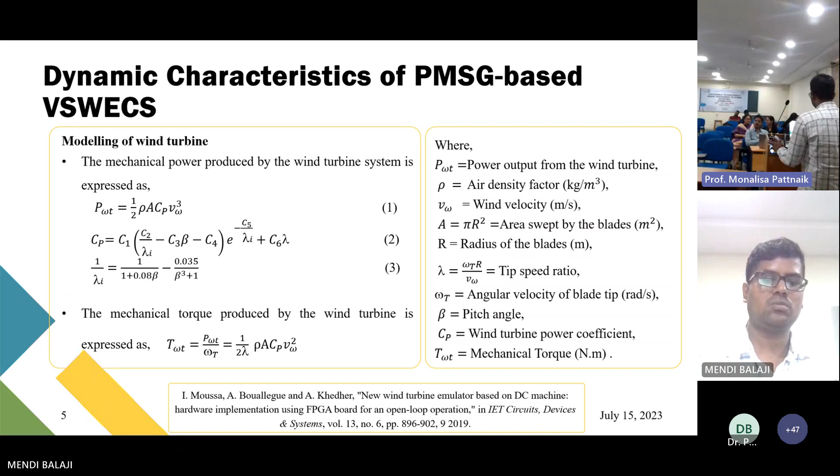So these are the dynamic characteristics of the PMSG based WECS. This is the modeling of the turbine equations, already covered by my colleague Pradyumna Kumar Bera. So here I am focusing on the steady state modeling equations of the PMSG.

The DC diode rectifier output voltage and current are given in equations 10 and 11. We get these by neglecting the commutating angle and inductance of the converter and the generator. Equation 12 gives the output power of the wind energy conversion system, also neglecting power loss during diode circuit rectification.

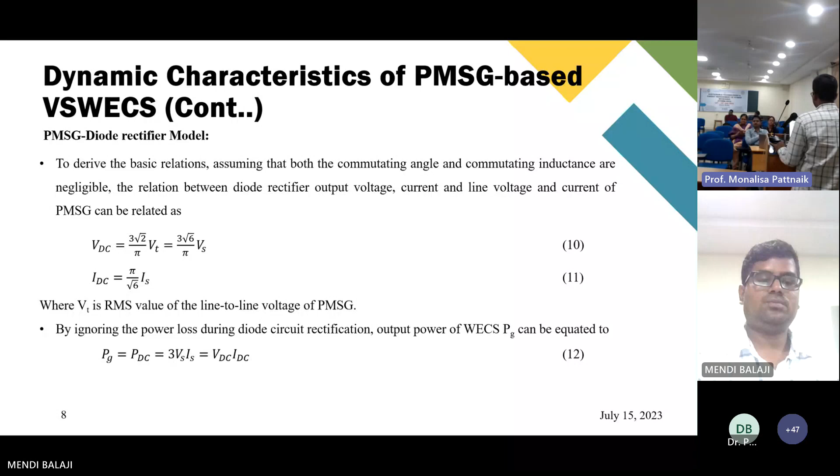That is about the dynamic characteristics of the wind energy conversion system. Now I am going to explain the boost converter basics, which we are already aware of.

The boost converter is used for two purposes: one is to enhance the voltage level, and the second is for extracting the maximum power from the wind. It is a simple non-isolated converter. The output voltage of the converter is given as input voltage divided by 1 minus D.

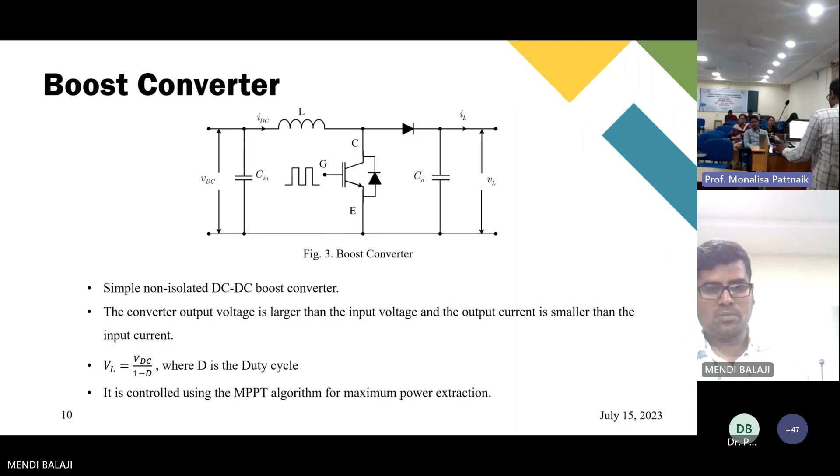These are the input impedance characteristics of the boost converter. Here the converter acts as a load, so we are interested in its input resistance. By varying the duty cycle of the converter, the input resistance will be varied, as represented by figures 4 and 5. By operating the duty cycle at the optimum level, we can extract the maximum power.

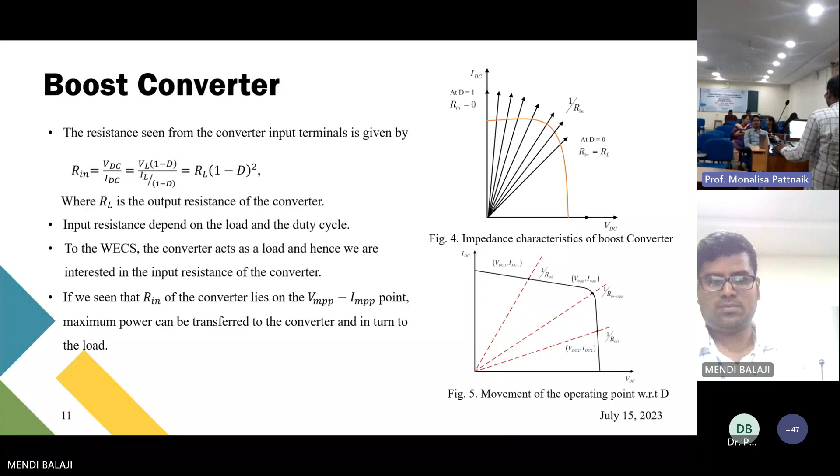These are the input and output characteristics of the boost converter in the wind energy conversion system with variation of the duty cycle. On the input side, as duty cycle increases, the boost converter input current increases while voltage is reduced. The PV characteristics of the input and output of the converter are different, and based on these characteristics, we can develop various MPPT algorithms.

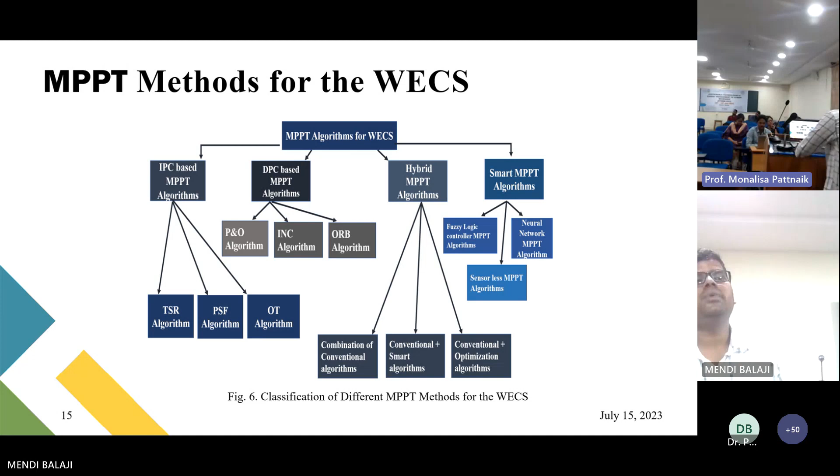So here I am focusing on the hardware implementation of the basic P&O algorithm, which I will now explain.

With that, we can develop one MPPT algorithm, which is the speed encoder based algorithm. What we have to do is transform that to converter parameters. For that, by neglecting the generator and converter losses, PM will be equal to the DC side power. Also, in PMSG, the terminal voltage of the generator is proportional to the speed, hence the speed is replaced with VDC. So in this way, dPdc by dVdc equals zero can be obtained, and with that we can develop the algorithm in terms of PDC and VDC.

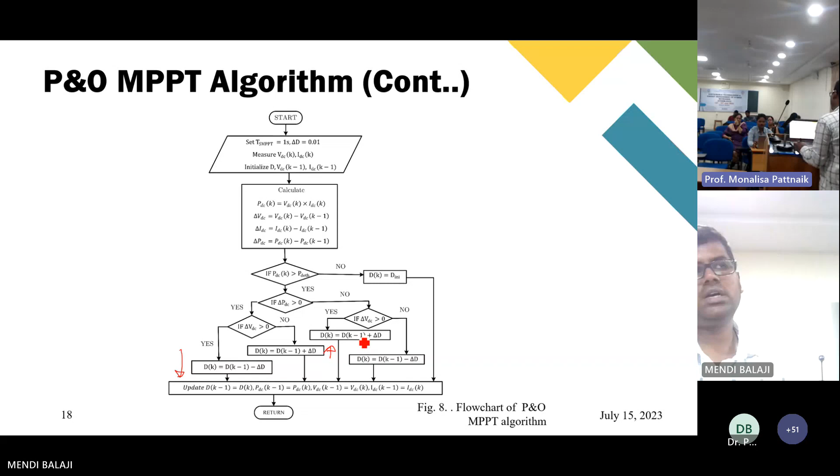If it is yes, then it will search the change in VDC condition. If change in power and change in VDC both are positive, then duty cycle will be reduced. If change in power is positive and change in voltage is negative, then duty cycle will be increased. In this way, we can achieve the MPP by giving the desired duty cycle.

In order to extract maximum power through proper duty cycle, you need to select the proper perturbation step size and perturbation step time. You cannot give any random change in duty cycle. If you give, suppose, a duty cycle change of around 10%, the change in voltage, current and power of the converters will be more, which may lead to more stress on the converter. That's why you have to select the proper delta D max and delta D minimum. In order to avoid steady state oscillations, you cannot use a very small delta D.

Suppose if you give 0.001, that much change may not be detected by digital controllers like dSPACE, DSP or OPAL-RT, since that depends upon the ADC resolution and tracking accuracy in the steady state. After experimentation, we have observed that the delta D range is 1% to 5%. So within that range we have operated, that is the healthy operating range.

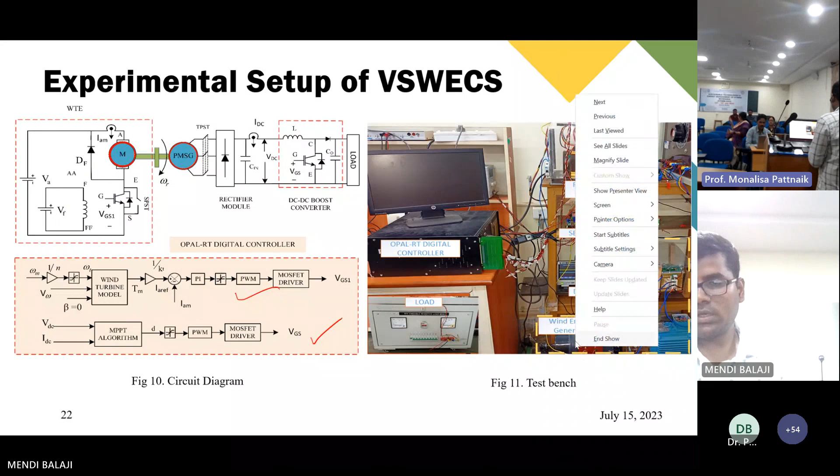These are the wind turbine MPPT, wind turbine emulator controller, and this one is the MPPT controller. These two are developed in the OPAL-RT software. This is the test bench of the wind energy conversion system. Here, all the sensor signals are interfaced to the Wanda box, made by OPAL-RT Technologies, through analog and digital cords. This is the DC motor coupled to the PMSG.

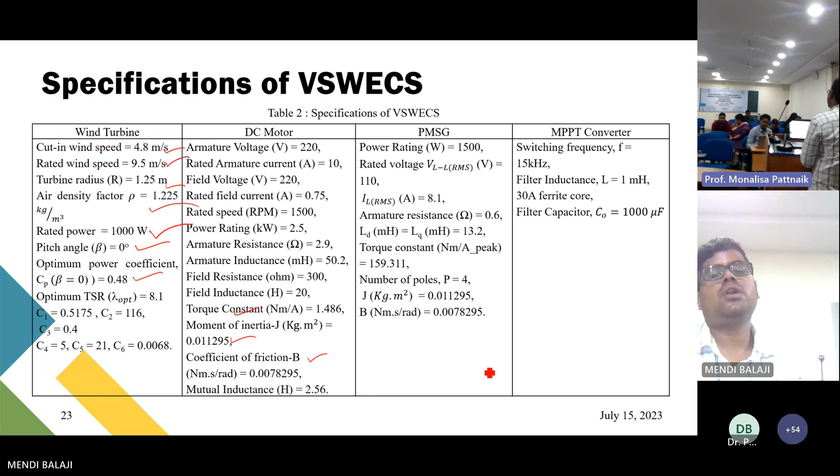Similarly for PMSG side, the nameplate rating they have given is 1.5 kilowatt, rated voltage is 110 volt, and rated line current they have given 8.1 amperes, and rest of the parameters we have calculated.

These are the MPPT converter specifications. The switching frequency we have considered 15 kHz for the IGBT, and the filter inductance we got around 0.74 millihenry. So we have taken a 1 millihenry 30 ampere ferrite core inductor, and filter capacitor 1000 microfarad 450 volt DC electrolytic capacitor we have used.

So for MPPT algorithm we need voltage and current sensors. For the voltage sensor we have used LV25P voltage sensor. It can measure up to 500 volt nominal RMS voltage, which requires plus or minus 15 volt DC power supply, and the burden resistance range we have to select in between 100 to 350 ohm.

Suppose for the MPPT converter you want to measure 300 volt, so that should be scaled down to 5 volt, and you need to choose one input resistor. We have selected 30 kilo ohm, so that the input current of the sensor should be around within 10 milliampere. So the burden resistance we have calculated is 200 ohm, which is within the range of 100 to 350.

So the extra components required are an input resistor of 30 kilo ohm and burden resistance of 200 ohm, and you need to give external DC supply of plus or minus 15 volt.

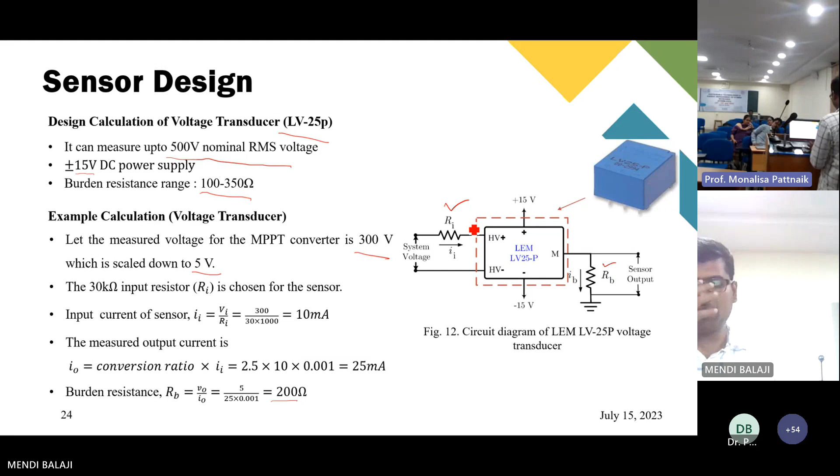And this is about the current sensor, which suppose if you want to measure current for 25 ampere, this is also considered in terms of voltage only, so it is scaled down to 5 volt. Here we have wound the number of turns as two only, because the conductor size diameter is more, so it is very difficult to wind more turns in the diameter of the current sensor. So we have considered 2, and accordingly we have calculated the burden resistance as 100 ohm.

That is also within the range of the burden resistance range, 50 to 160 ohm. So here the extra components needed are number of turns, 2, and the burden resistance value we have considered, 100 ohm. Here also external plus or minus 15 volts is required. In this way we can measure the current.

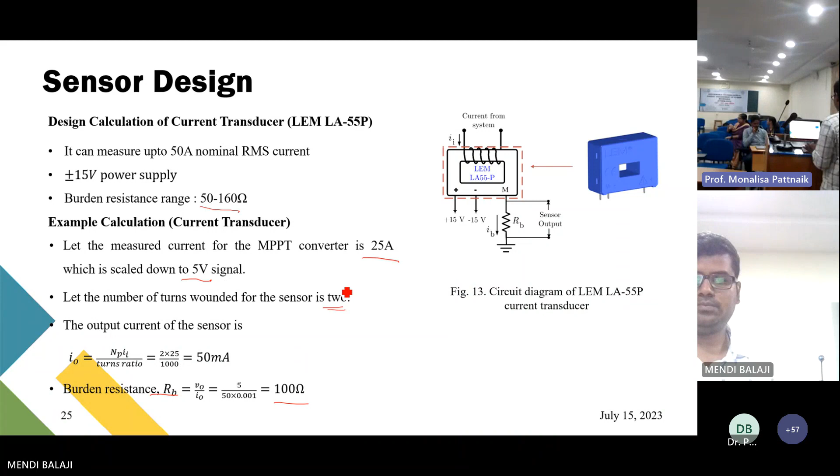So these are the low power signals. These can be interfaced to any software like Opal-RT, dSPACE, or DSP software. This is the wind turbine emulator we have developed in the laboratory.

So to drive the IGBT, we have used Skyper 32R gate driver, and Opal-RT generates a 5 volt PWM signal, but to drive the IGBT it requires 15 volt. So we have used a bootstrap circuit which will convert the 5 to 15 volt PWM signal.

This is the IGBT we have used, SKM 75GB 12T4, meaning 75 ampere 1200 volts, which we have used.

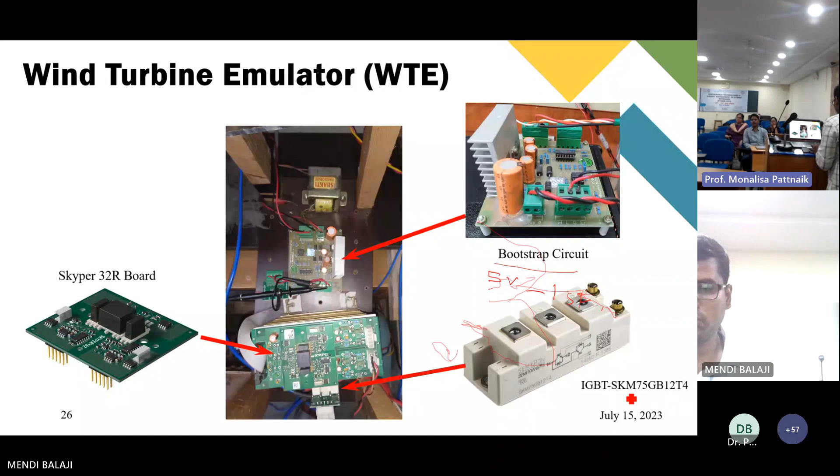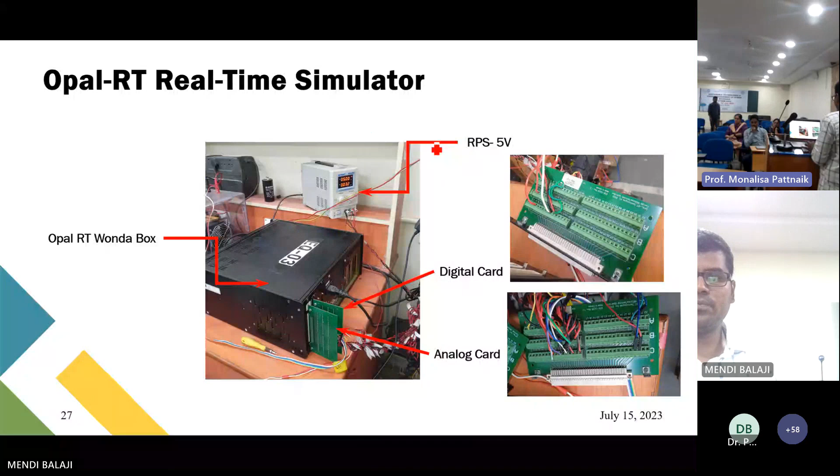This is the Opal-RT real-time simulator, the Opal-RT Wanda box, in that a DSP processor is inside, which is made by Opal-RT Technologies. Here the sensors and PWM signals are interfaced through analog and digital cards. For the digital card, to produce the PWM signal, you need to give external 5 volt power supply. For that, an RPS we have used, which is set to 5 volt.

Earlier my colleagues have used DSpace for the PV system and for the wind system. Here I have used Opal-RT software. So I will explain how to use this software to interface for the rapid control prototyping, meaning the plant is outside, where generators, turbine, PV will be outside, and only the controller is inside the PC.

So hardware requirements are: a host PC required, the Wanda box already I have shown which is manufactured by Opal-RT Technologies, and one LAN wire is required, which is the communication link between PC and Wanda box.

The software requirements are RTLab software, version 10.6.5.293. This one we have used. This is the old Opal-RT, so that's why we have used the compatible software, the 2011 32-bit version. Now Opal-RT has upgraded its version of MATLAB support, it can support the latest one also.

So in this video, I will explain how to develop the MATLAB model, and what are the steps required to execute the model. These things I will explain in this video.

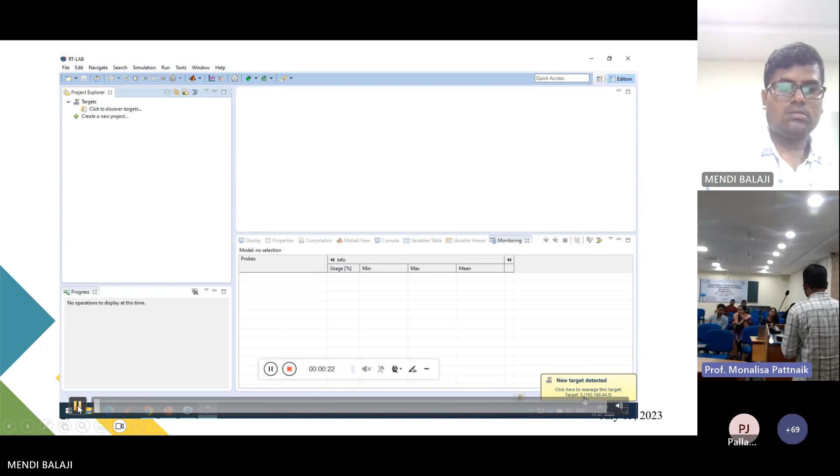So once the Wanda box is switched on, then you need to create the target. Mostly it will detect automatically. There you have to address the IP. So here the state is showing up, license is activated. That means Wanda box is switched on.

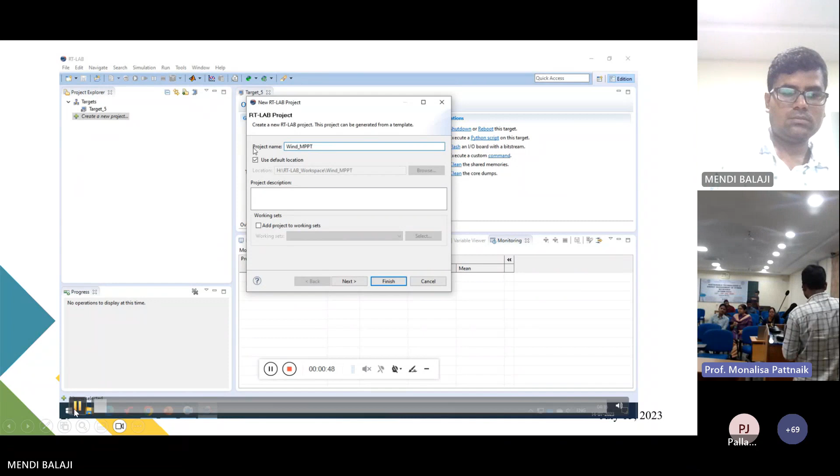Once the target is set, the next step is you need to create the new project. So here I have given name some wind MPPT. So project is created, which is shown on the left side.

So go to workspace, which is in H drive. So there wind MPPT folder is created automatically. So in that folder you have to place 3 files, which are: one is MATLAB model, second one is bitstream file, and third one is configuration file, pin configuration file.

So those 3 files I have copy pasted in the folder which we have created. Bitstream file enables the library of the RTLab through MATLAB, and pin configuration file is used to identify the pins where we are connecting the sensors and extracting the PWM signals. For identification of that, we are configuring the pin configuration file. It is 1 KB bit file.

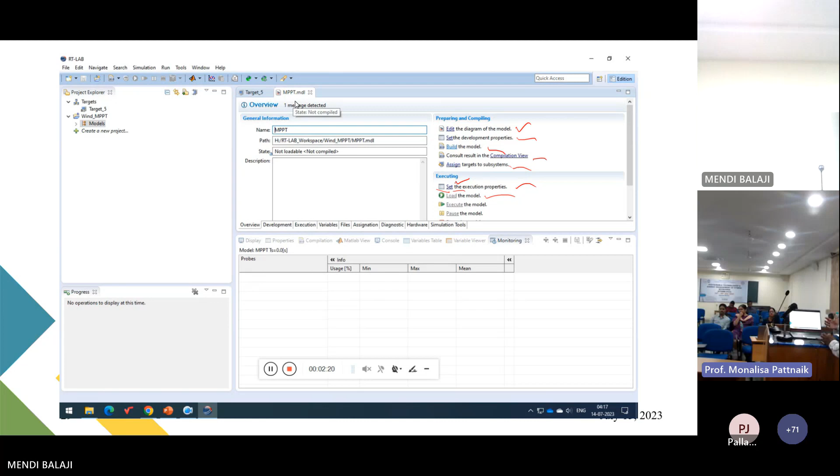So these are the steps to execute our model. First one is edit the model. Second step is we have to develop the properties. Then build the model. Building means it will generate C code which can be understood by the DSP processor of the Wanda box. Then compilation view. Then you have to assign the targets and execution properties. Then you have to load the model. Once you load the model, that means it is ready to deliver the PWM signal or ready to take the sensor signals. Once you execute, then it will generate the PWM signals.

So this one I will explain one by one.

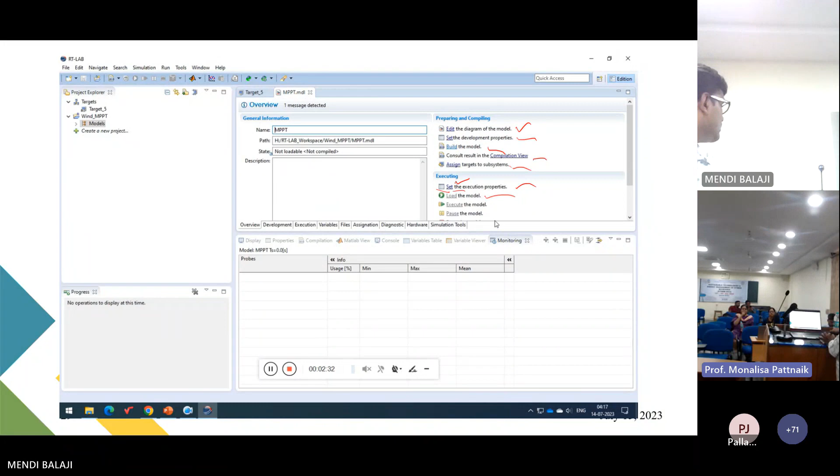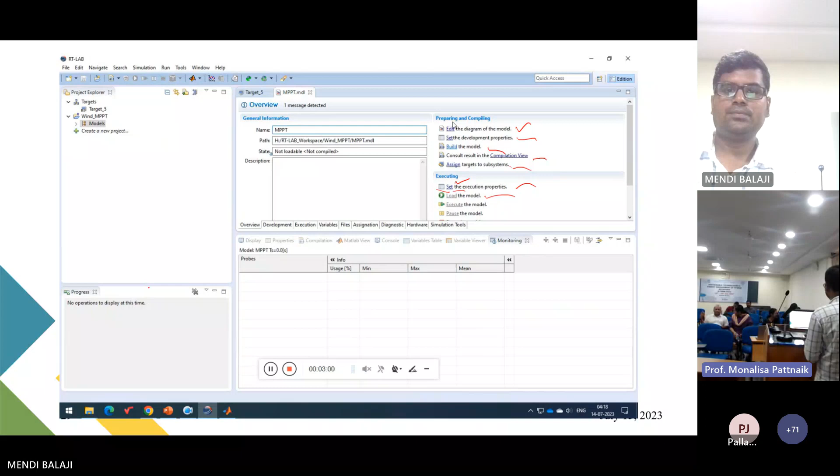So you have to open the MATLAB through RTLab software only. Then only the RT-LAB library will be added to the MATLAB Simulink library. So here MATLAB is opened through RTLab. MATLAB main window is opened. Then edit the model.

So this is the model we have created in the MATLAB Simulink. So we have to create two subsystems. One is computational subsystem, another one is for displaying the results. So you need to give naming SM underscore some name you can give, and another block is SC underscore some name. Then only the Opal-RT software can understand, can compute the model.

So in this way you have to give the naming. In the SM computational, where entire our model is presented, and this one, the SC model, is for displaying the results. And here our emulator controller and P&O controller is presented.

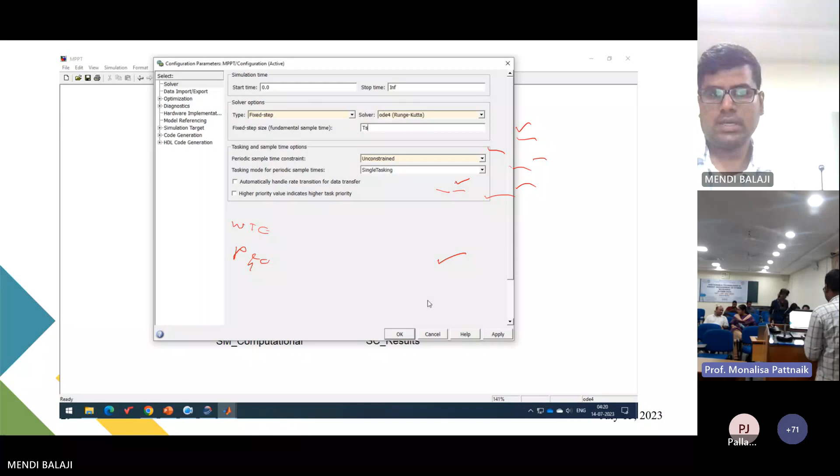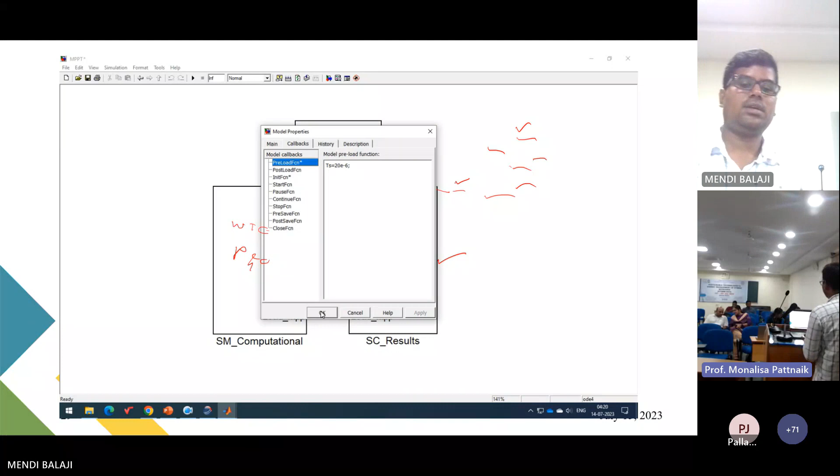And in the configuration parameters, solver type should be fixed step, and solver I have used Runge-Kutta ODE4, and fixed step size I have given the name TS, I have given 20 microseconds. 10 microsecond to 50 microseconds we can use. In the model properties callbacks, there I have addressed TS, which is 20 microseconds, so that in each and every block we no need to mention 20 microseconds. Directly we can call TS name.

Power GUI block, there also the simulation type discrete, solver type Tustin I have used, and sampling time there also you have to mention. And the simulation time should be infinite, INF.

So this is the model we have developed. In that, wind turbine emulator controller is presented, MPPT controller is presented, and also this software facilitates the storage of hardware data. We can store the data through DSO, or it will store the data in .mat file format. And these are the analog sensor integration and PWM generation. So these blocks are available in the library that I will show. This is the block required, OP control OP5142.

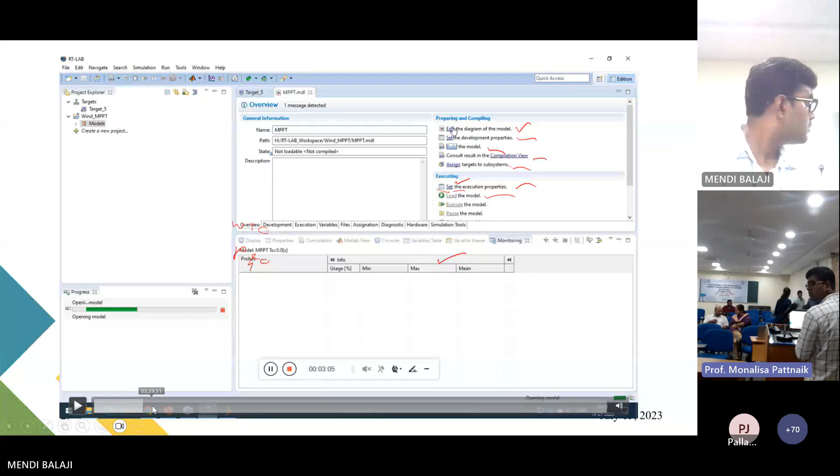In the library, RT events, RT Lab, RT IO are added in MATLAB. Go to RT Lab IO, then go to OP5142. There analog in, analog out, digital in, digital out blocks are available. From there we have taken the OP5142 control block. This block controls the programming of one OP5142 card. It initializes and selects the hardware synchronization mode of the card, and enables the analog and digital signals.

This is the first block we have to add to the model. There, the bitstream address we have to give. In the workspace, we have copied 3 files: bitstream file, configuration file, and Simulink model. That bitstream address we have to copy paste here. So this is the bitstream file. That address you have to copy into the OP5142 block. Remaining things you keep as it is.

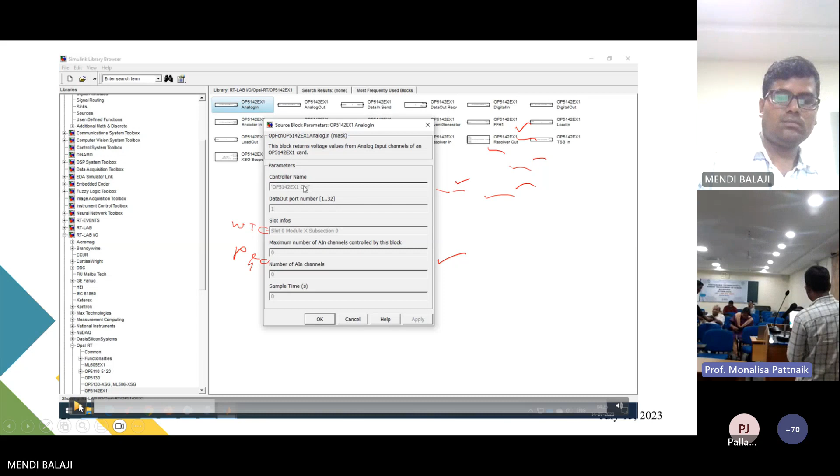Then to interface the sensor signals, you need to use the analog in block, which is also available in the RT-LAB library. This is the OP5142 analog in block, where we can connect a maximum of 8 sensor signals. Here I am using 6 sensor signals. For the boost converter, 4 signals are required: input voltage side, input current, output voltage, output current. And for the emulator, a current sensor is required. And for the speed encoder also we have used an analog in channel.

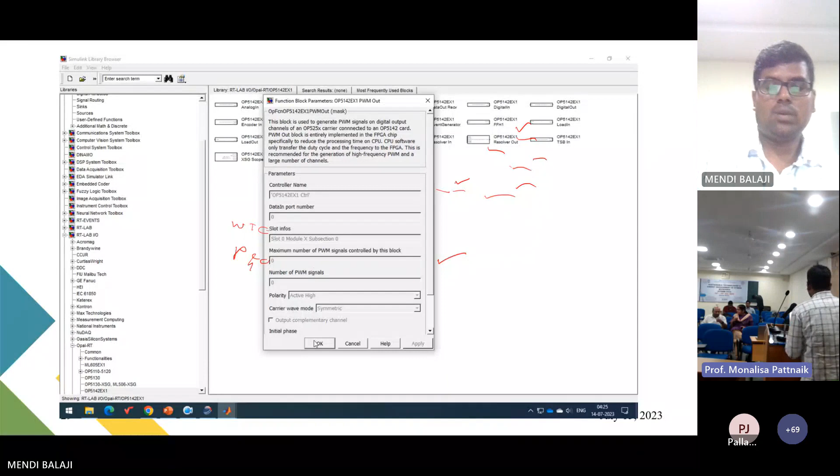This is the PWM out block. This Wanda box can give a maximum of 8 PWM signals.

Using the pin configuration file, we can activate this analog in block. This is the pin configuration file where analog in number is data out 5. That number we have to enter there, so that it will select slot 1, module B, subsection 1. There we can give a maximum of 8 analog in signals. Data out 5, data out 6 - total 2 analog in blocks are there, meaning total 16 signals we can connect.

Once you give data out port number 5, then that slot information will be activated. So the maximum number of analog in channels we have considered is 6.

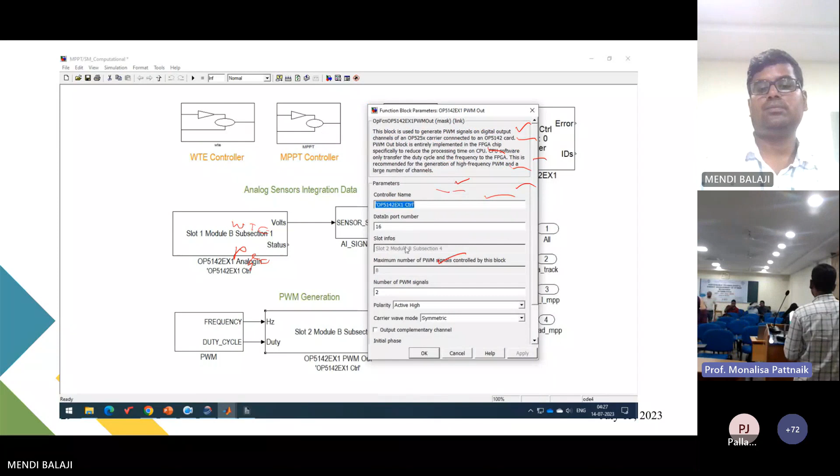Next thing is the PWM out block. The inputs required are frequency and duty cycle, which can be selected by entering data in port 16. So the slot, it is slot 2, module B, subsection 4, which is having 8 PWM out signals.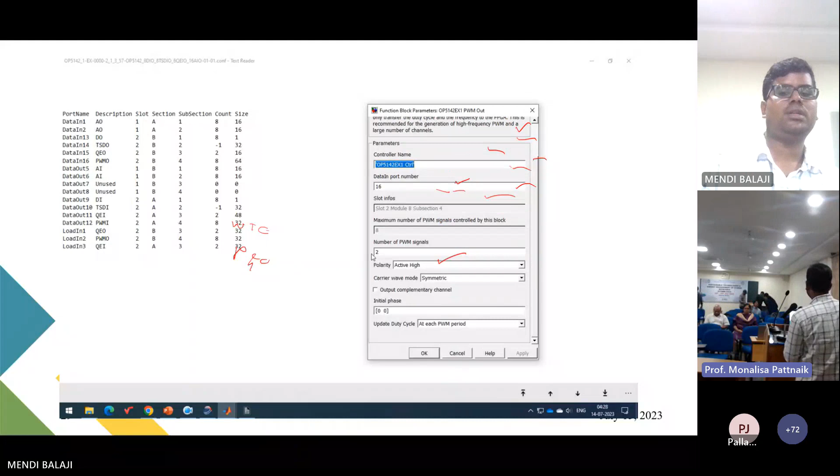Here I have used number of PWM signals 2: one is for the wind turbine emulator controller, second one is for the MPPT controller, P and O. So since there are 2 signals, the initial phase should be 2. If we want some complementary signal, then you have to highlight that one, and at that time also we can mention it.

So next thing is wind turbine emulator controller design, where the modeling equations of the turbine are presented. Here CP calculation, lambda calculation, mechanical power calculation, armature reference current calculation are given, and also wind turbine duty cycle generation through a PI controller has been developed.

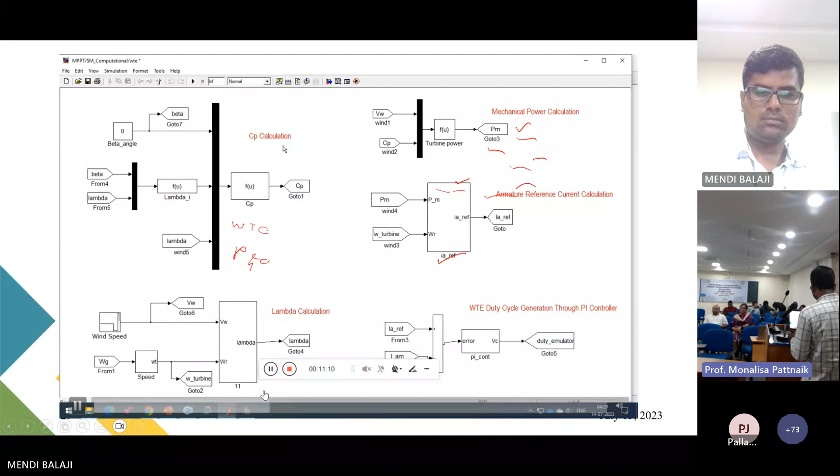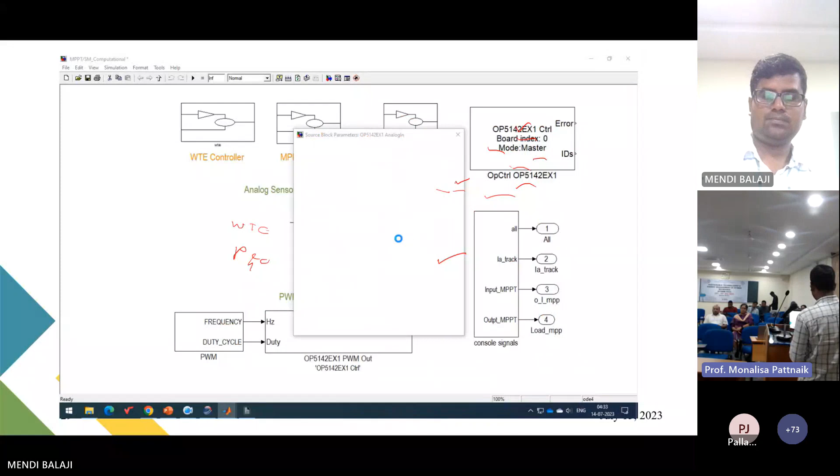So next thing is sensor signals. These are the six signals we have extracted from the plant.

First one is the speed signal, where we have used a proximity sensor, connected to the first channel of the analog in. Second one is the armature current sensor from the wind turbine emulator. Third one is the boost converter input voltage sensor. Fourth one is input current. Fifth one is load voltage sensor, and sixth one is load current sensor. These 6 sensors we have connected from the analog in.

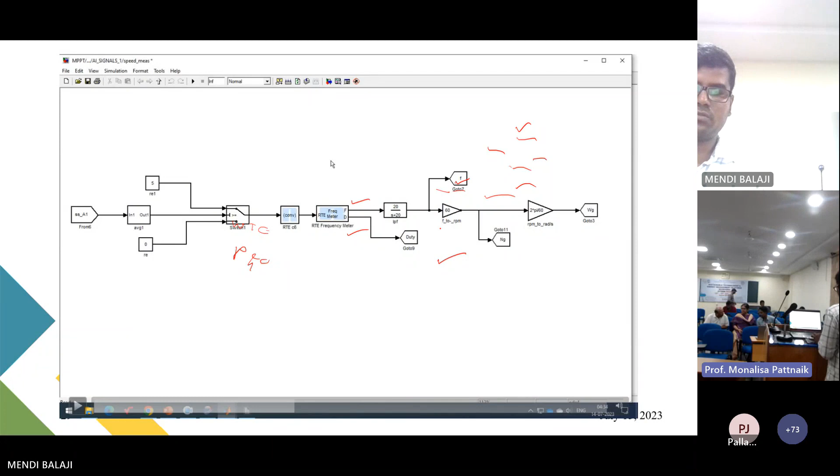This is the speed measurement. Here we are getting some speed sensor signal, which we give to the RTE frequency meter that separates frequency and duty cycle. From the frequency, it is filtered and converted to RPM, frequency to RPM, then RPM to radian per second. In that way we have converted it.

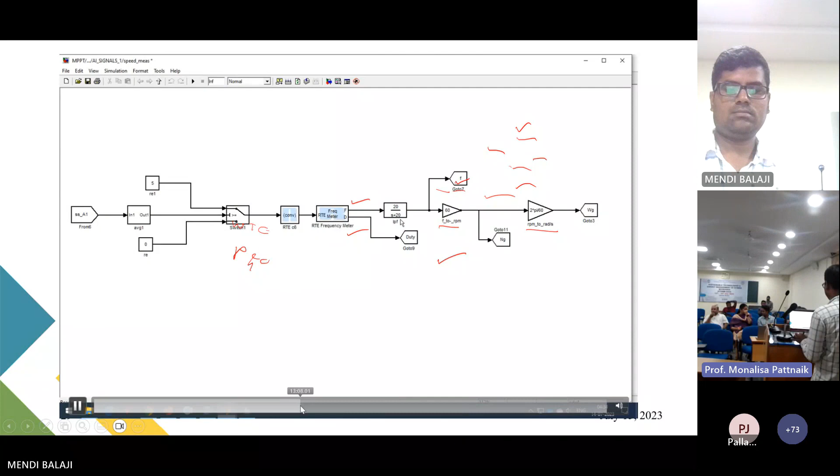These are the sensor signals. This is the armature current sensor. This one is subtracted with its offset value. When you give the current sensor plus or minus 15 volts without running the experiment, it will still show some offset value, so that one we are avoiding here. Then it is processed through the low pass filter, we have used 20 by S plus 20. Then it is averaged, and multiplied with the sensor gain, so that we will get the actual plant value here.

And also the VDC sensor is processed the same way. It is differentiated with the offset value, then given to the low pass filter, and multiplied with its voltage gain 53.62. This is the VDC actual. Similarly, IDC and PDC we are getting from the multiplication of VDC and IDC. Similarly on the load side, V load, I load, and P load we are getting. These are all the average values. For the MPPT algorithm we require the averaged value, so that's why we have used low pass filters.

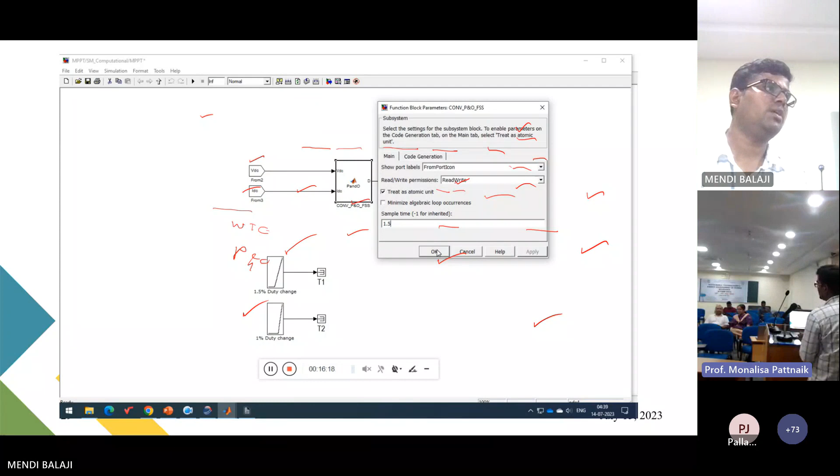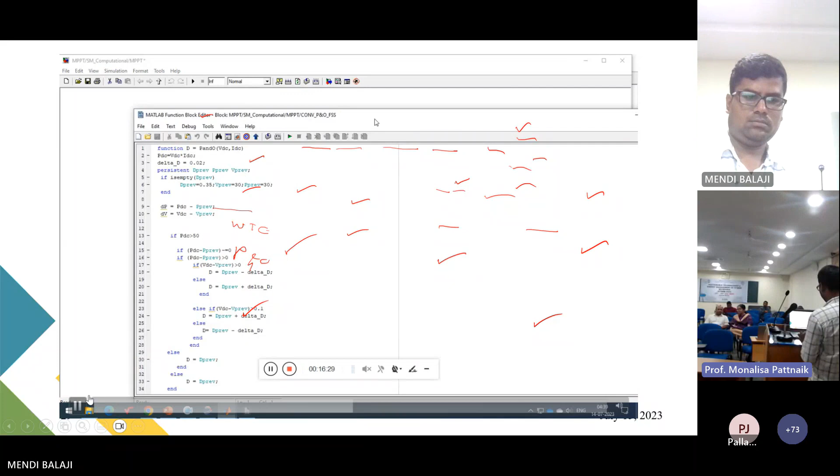This is the MPPT code we have used. First of all, we have to call VDC and IDC. Then PDC is calculated as VDC into IDC. Perturbation step size, here I have considered 2%, 0.

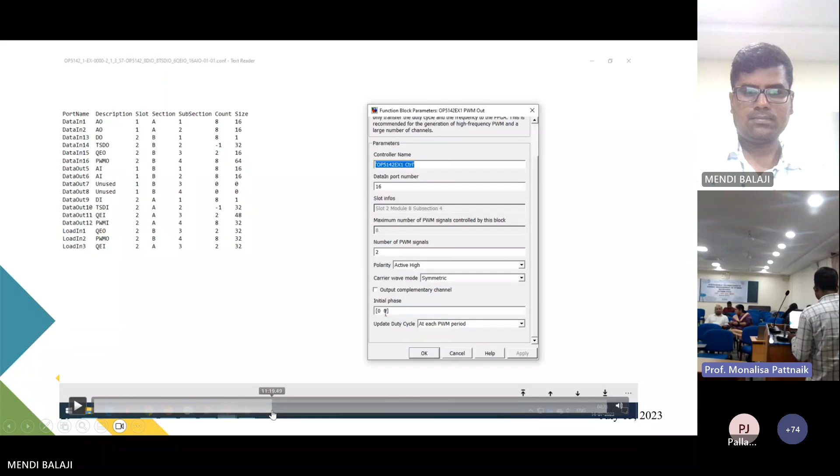So perturbation step size we have considered 2%. Then initialize the duty cycle, PDC, VDC. Here D previous we have considered initial value 0.35, V previous 30, P previous 30 watt.

Then write change in power as PDC minus P previous. Change in voltage is given as VDC minus V previous.

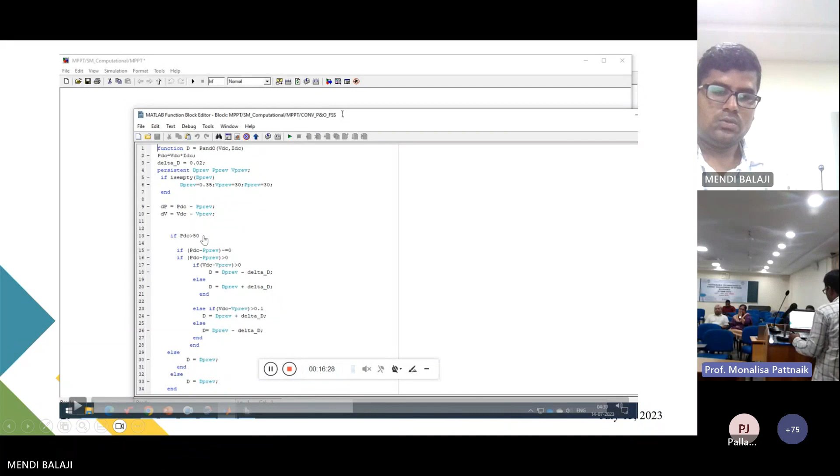Then mention some threshold value: if PDC is greater than its threshold value, I have considered 50 watt, because we have executed the model for 1000 watts, so 50 watts which is very less. That's why we have considered 50 watt.

Then check the condition of the change in PDC, change in VDC. All these things I have mentioned in the flow chart.

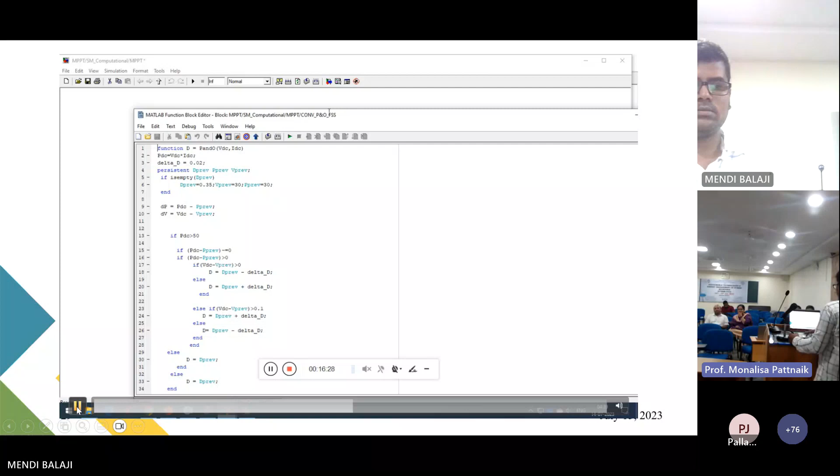Duty cycle should not go to 0 or 1. So in order to avoid that, I have given the range: it should operate between 0.1 and 0.8. If duty is more than 0.8, then it will settle to its previous value, or if duty is less than 0.1, then also it will settle to its previous value.

Then update the previous values, D previous, P previous, V previous with its actual values, so that we will go to the next iteration.

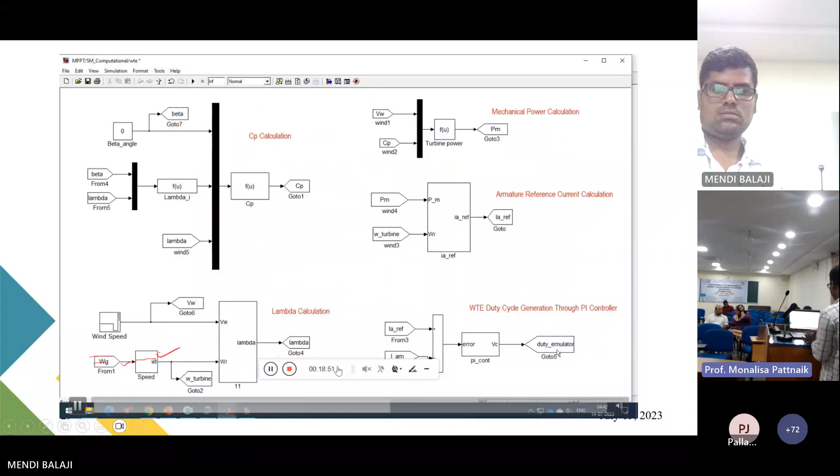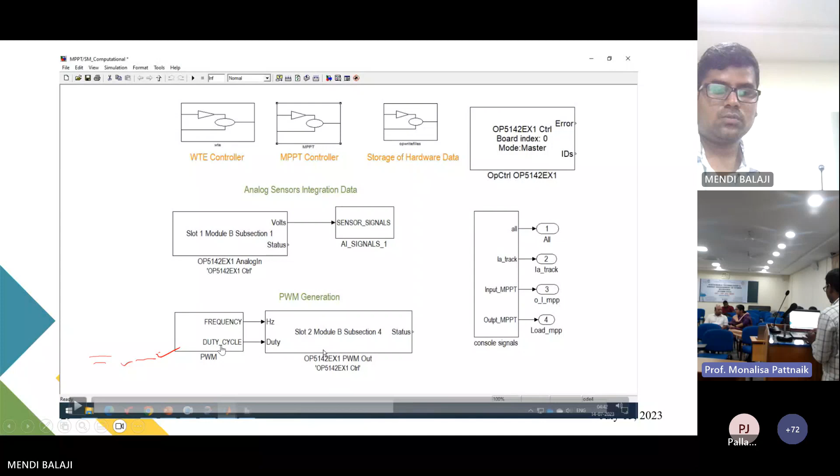So the PWM out block requires frequency and duty cycle. So duty cycles we get from the wind turbine emulator controller and MPPT controller, that one I have given in this subsystem.

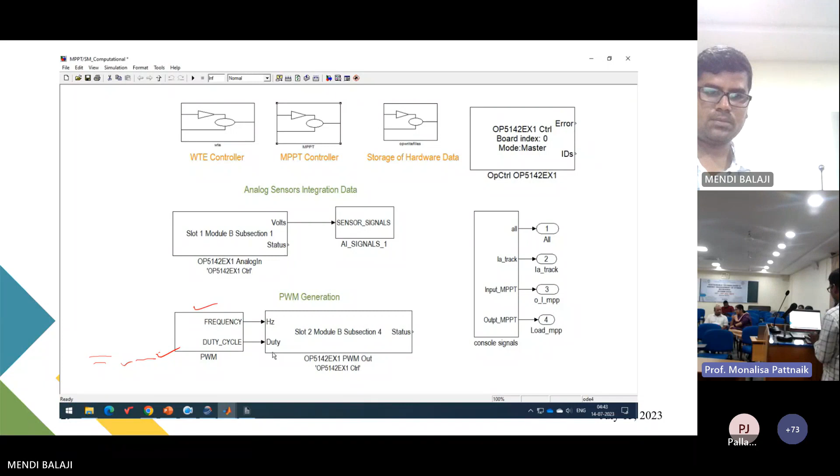Here frequency and duty cycle are given individually. Both the wind turbine emulator and boost converter switching frequency, I have mentioned 15 kHz with some constant block, and these are the duty cycle of the emulator and duty cycle of the P&O. In this way only the PWM out block can understand.

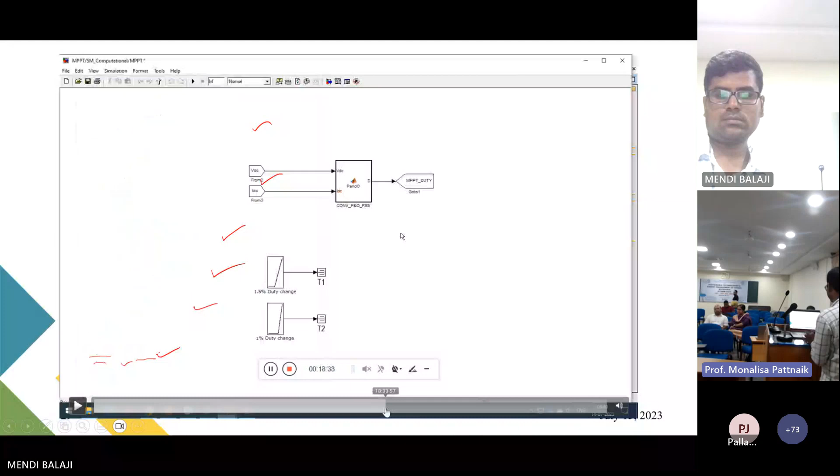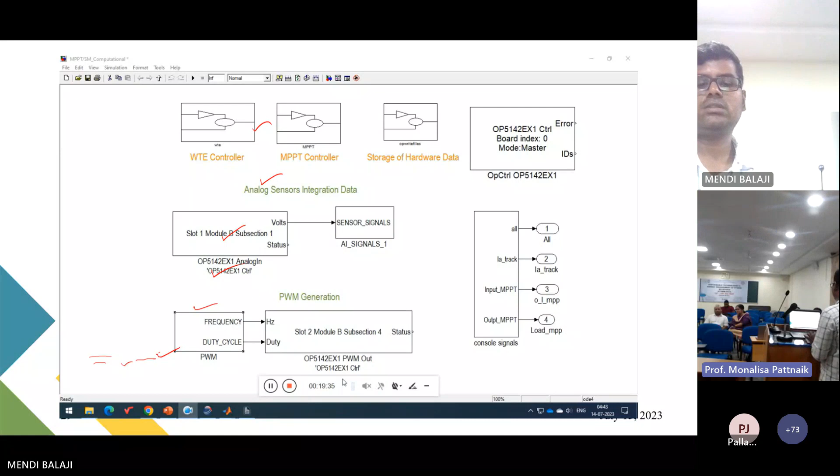These are the console signals to display our results in the console block. I have given tracking current, wind turbine side signals and converter signals. All these things we can scope in the console block.

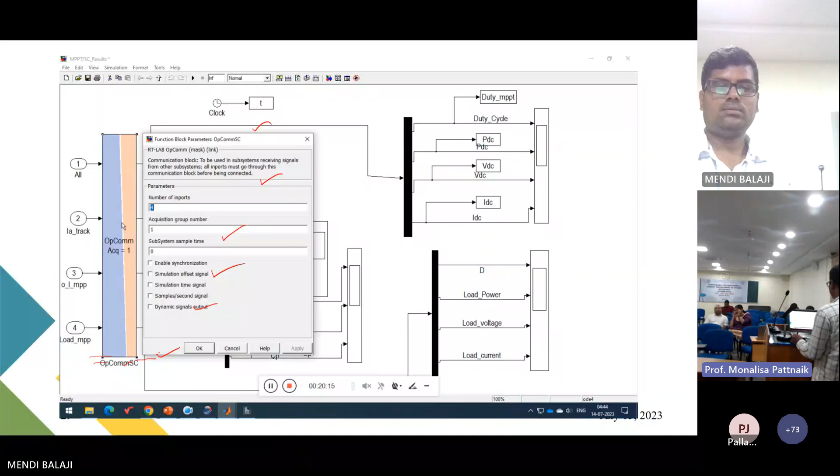So master to SM block to SC block, you can call the signals through the OpComm block, then only it will display the results. That is available in the RT-LAB, there the OpComm block is available.

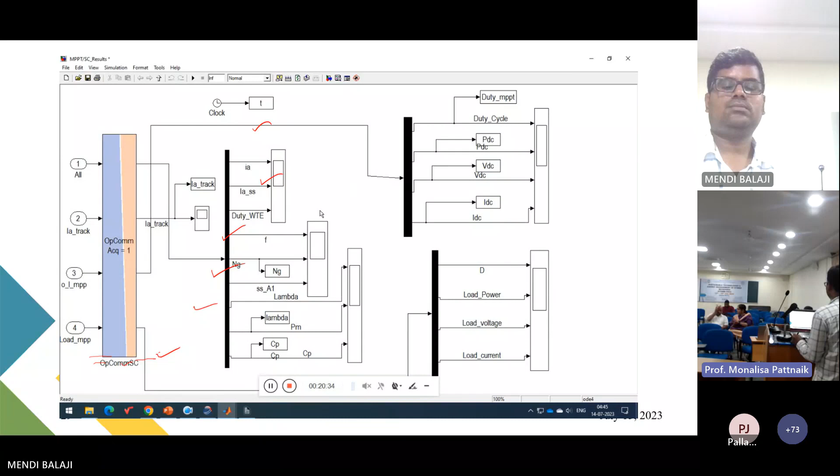The next thing is about storage of hardware data. For storing the hardware data, you need two blocks: one is op write file and op trigger. So op trigger is used to store the data between the specific intervals.

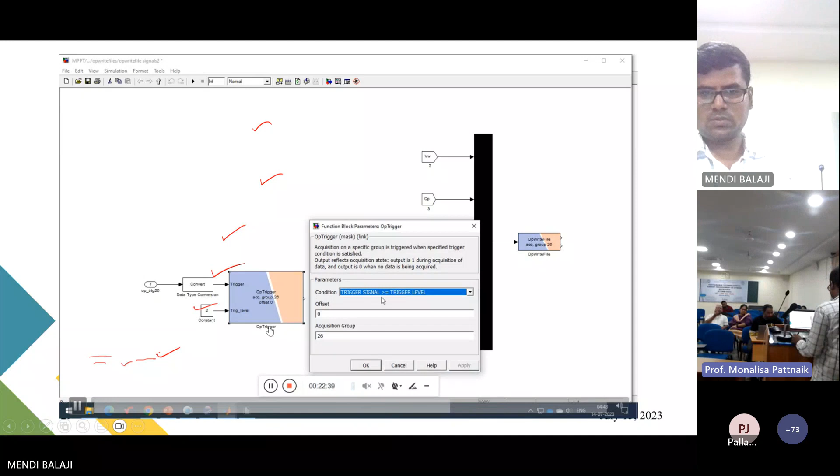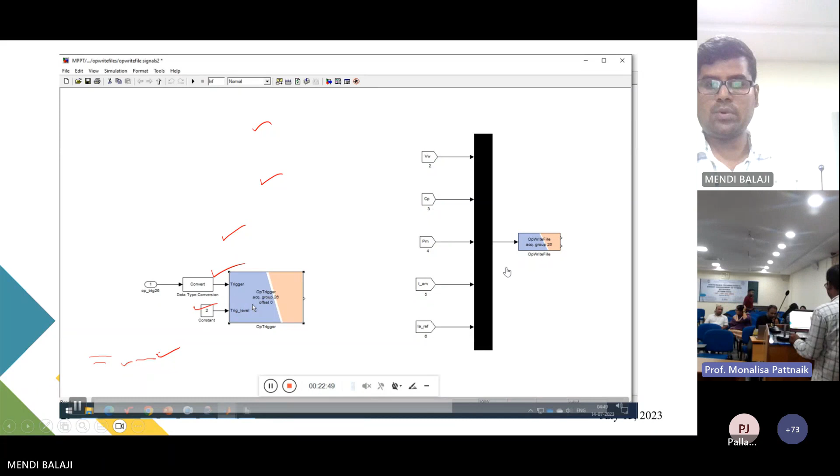Here all the signals are given to the op write file. We can store the data between 100 to 140 seconds by triggering its block. Here number of samples I have considered 10 since all are DC signals. So this data will be stored in the workspace, the RT-LAB workspace, where our model is presented. All the calculations are given here for how to give the size of the op write file block.

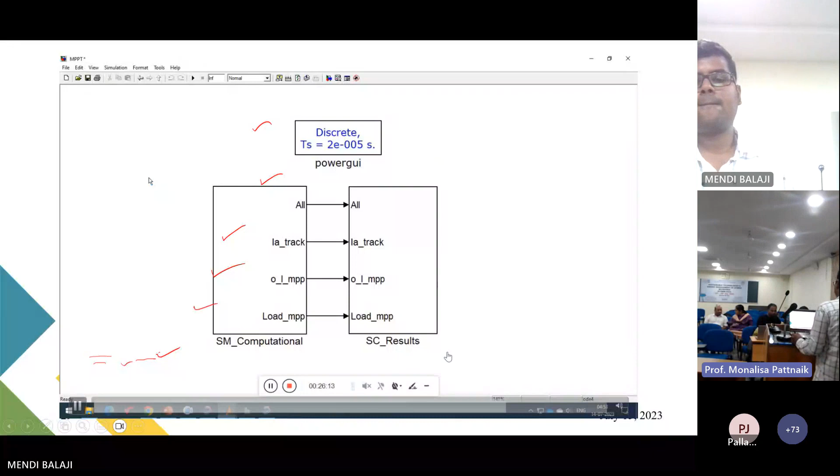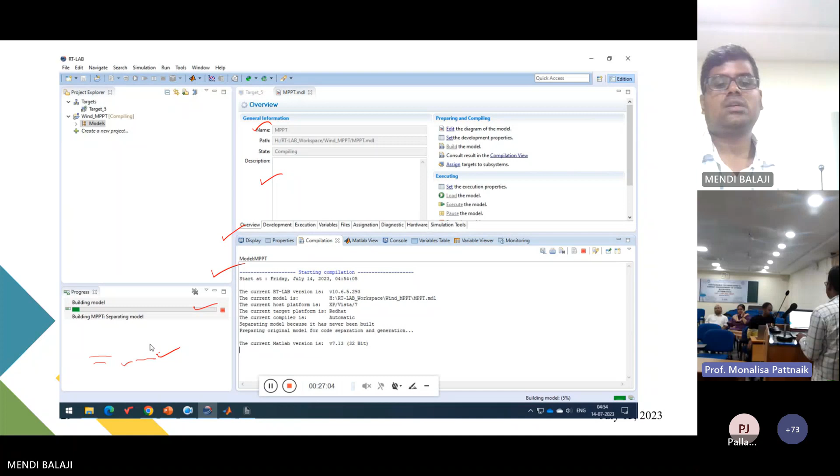So we have modeled the MATLAB Simulink model for the controller. Then the next step is we have to set the development properties. There, target platform should be Red Hat. Then build the model so that the SM block will be converted to C code.

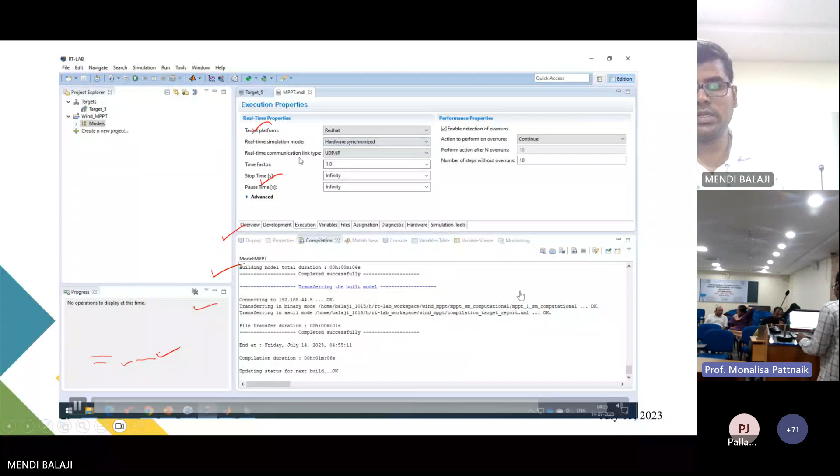So the model has been built. The next step is compilation view, then assign the targets, their XHP mode should be on. Then set the execution properties, their real-time simulation mode should be hardware synchronized. Then load the model.

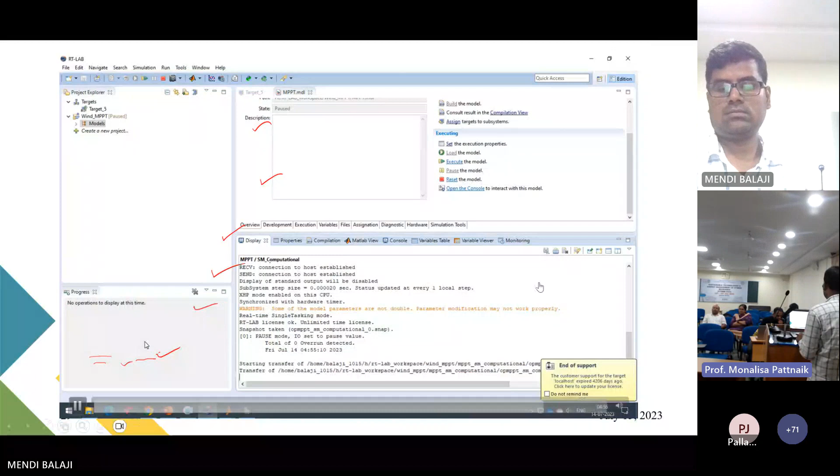Once the loading is done, then you have to execute it. Once you execute the model, then the console window will be opened so that it will start generating the PWM signal. So this is the process of the usage of RT-LAB software.

In the next video, I will show the experimentation P&O MPPT experimental demo. Here I have given wind speed 8.5 meters per second. Same steps I have said: build the model.

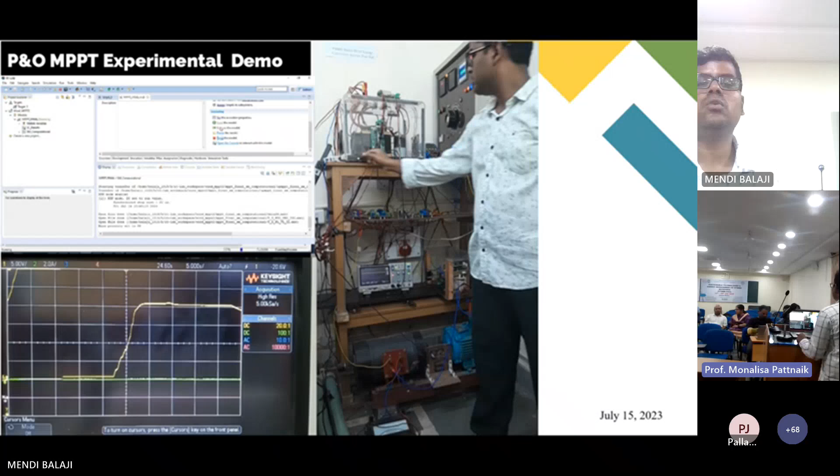Then set the DC motor voltage to its rated value. I am setting it to around 220 volts. Then connect the load.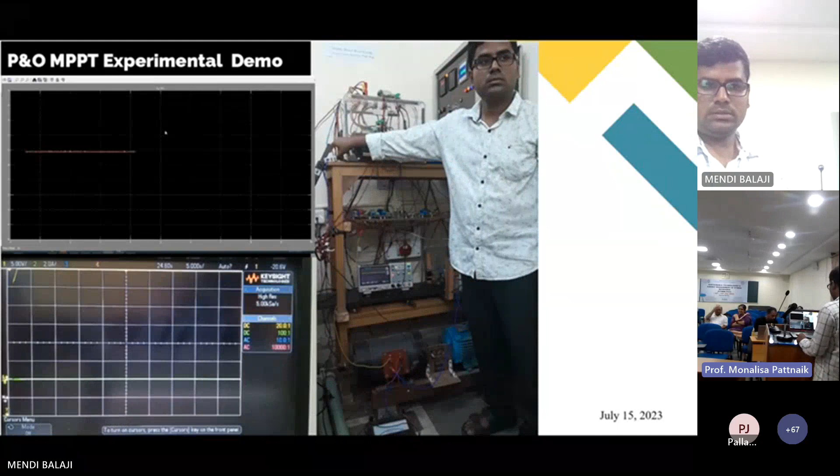In the DSO, we are showing VDC, IDC and its power. This is the armature tracking current. Once you close the load, switch on the load, then the armature tracking current is increased and the DC link voltage is settled to 3 steps, and also the DC link current is settled to 3 steps. That one is clearly visible on the DSO, VDC and IDC. This is the armature tracking current.

Since we are getting duty cycle 3 steps, the same thing is followed on all the parameters like CP, generator speed, armature current tracking, VDC, IDC, PDC. Everywhere you will get the 3 step.

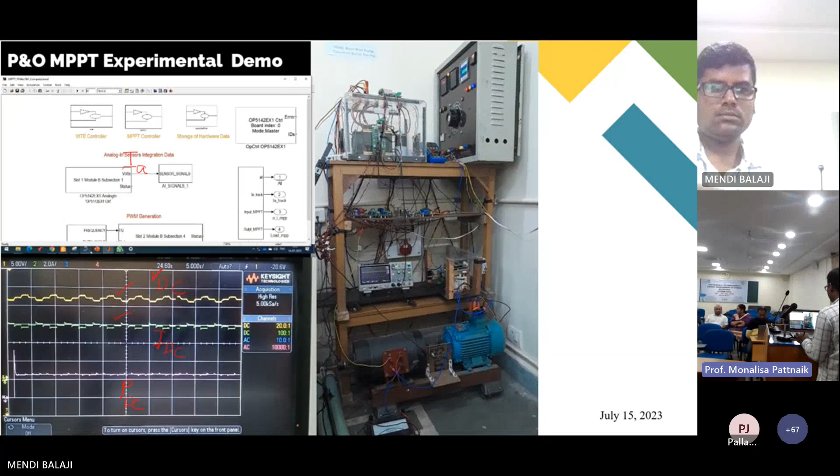Meanwhile, you can change the wind speed also. The variable table calls the wind speed from the SM block. Initially we have given 8.5 meter per second. Now I am reducing wind speed from 8.5 to 7.5 meter per second.

You can observe the changes also in the DSO. See, I have given wind speed 7.5 so that the VDC is reduced, IDC reduced, the power also will be reduced. Due to less wind speed, there will be less power generation.

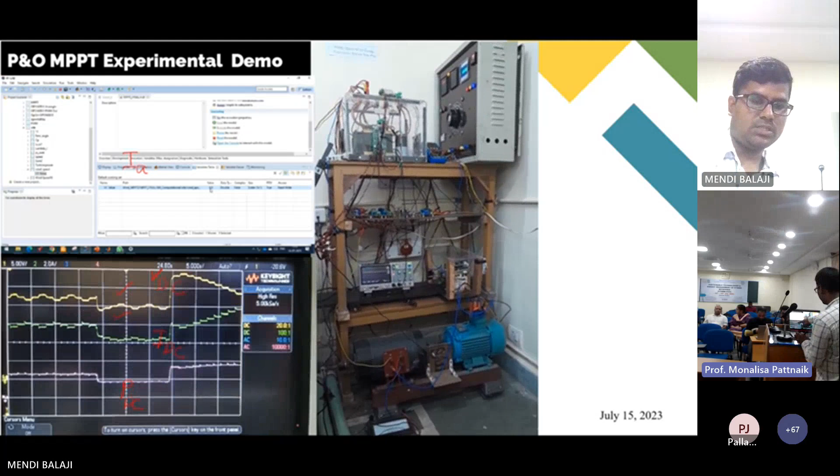Now I am increasing the wind speed to 8.5 meter per second from 7.5. You can see the sudden change in the VDC, IDC and PDC. Armature tracking current also increases, which settles at around 6.5 to 7 amperes.

These are the other results of the system. These are the duty cycle, PDC, VDC, IDC in the scope of the block. You can observe that the 3-step duty cycle we are getting there, and the VDC, IDC also.

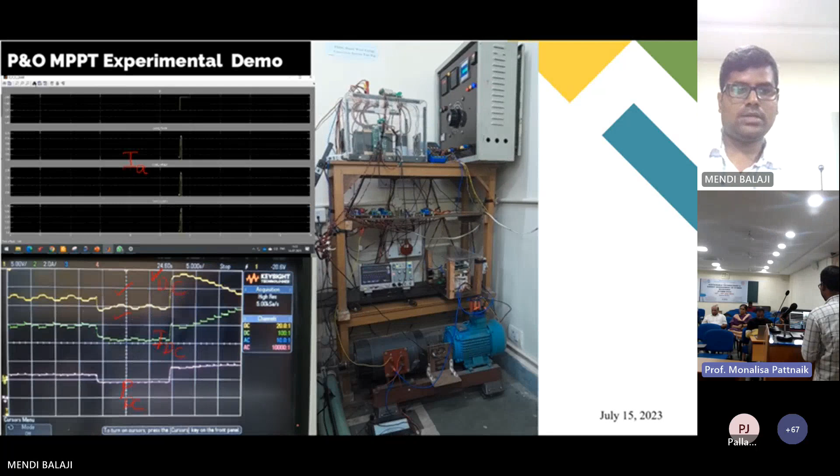These are the load side parameters. Again, duty cycle, load power, load voltage, load current - these 4 results are displayed there.

These are the mechanical power, lambda and CP. The last one is CP, which is operating around 0.48, which is the maximum value. That means the turbine is extracting maximum power.

So once the experimentation is done, first you have to turn off the motor, disconnect the load, then turn off the motor and switch on the emulator SPST switch. Once the motor is off, then you can reset the RT-LAB.

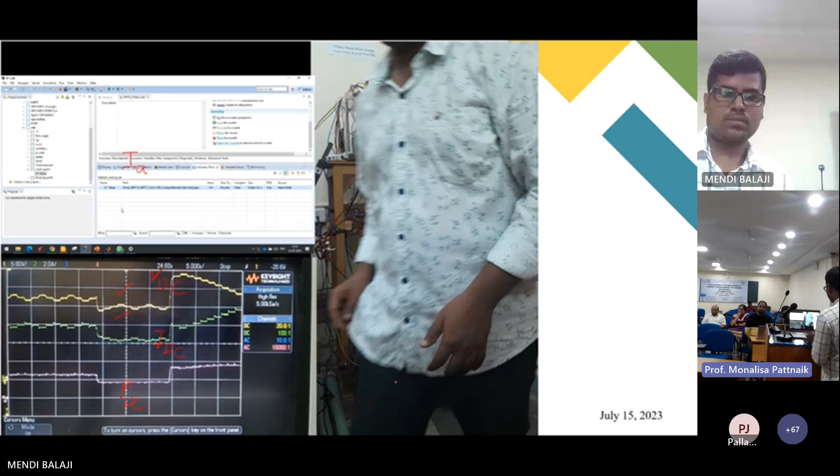So this is the experimental waveform I have shown in the video. This is the VDC, IDC, and this one is the PDC for different wind speeds. So it is working properly for different wind speeds, for increased and decreased wind speeds. So these are the two.

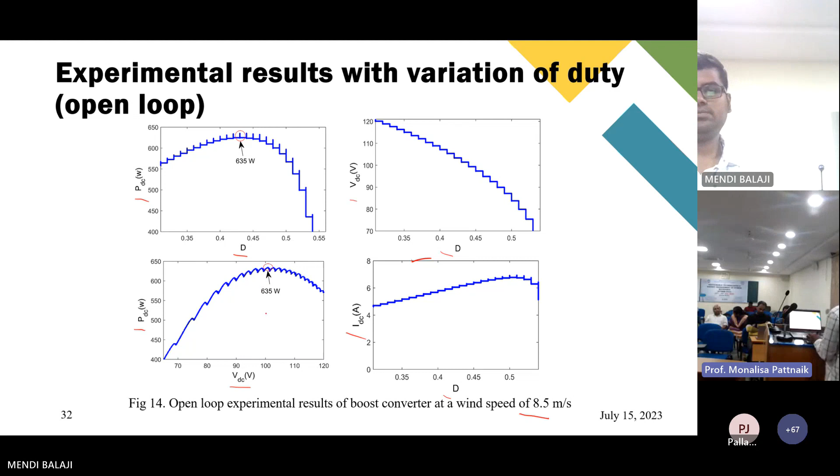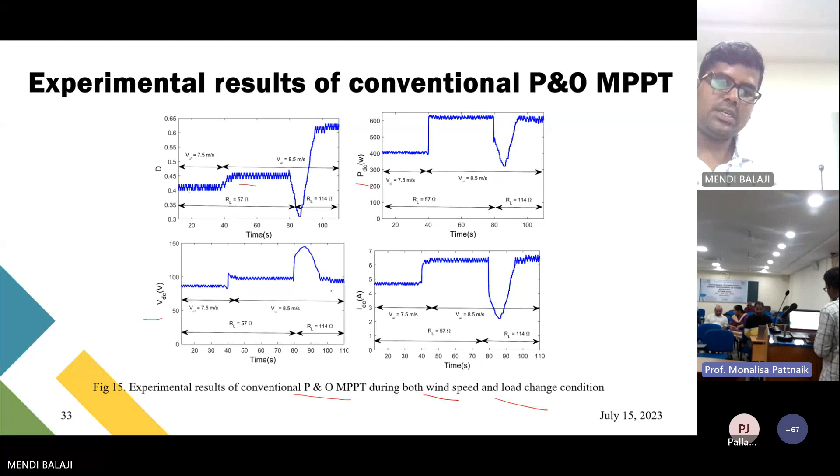So in this session I have covered the mathematical modeling of the dynamic characteristics of the PMSG and the 1.5 kilowatt boost converter design for the extraction of maximum power, the design calculation of voltage and current sensors, and the test bench demo also I have shown, and the conventional P&O algorithm has been implemented on that developed test bench. So these are the references.

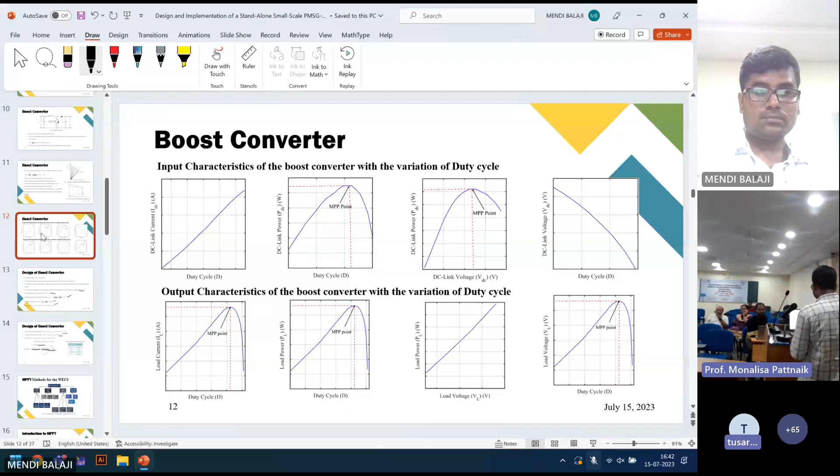So how is the load current here, it is a boost converter, no? With respect to duty cycle, the voltage will be increasing. So how the load current is, you have shown it increasing, in the fifth figure, the load current characteristic versus duty cycle. That load current is increasing, but how is that possible? Simultaneous voltage and current will be increasing? So it is not an amplifier, a converter is a regulator.

See, this is the load current versus duty cycle for boost converter configuration. If you change the converter, you may not get the same graph. That is the behavior of the converter with the variation of the duty cycle.

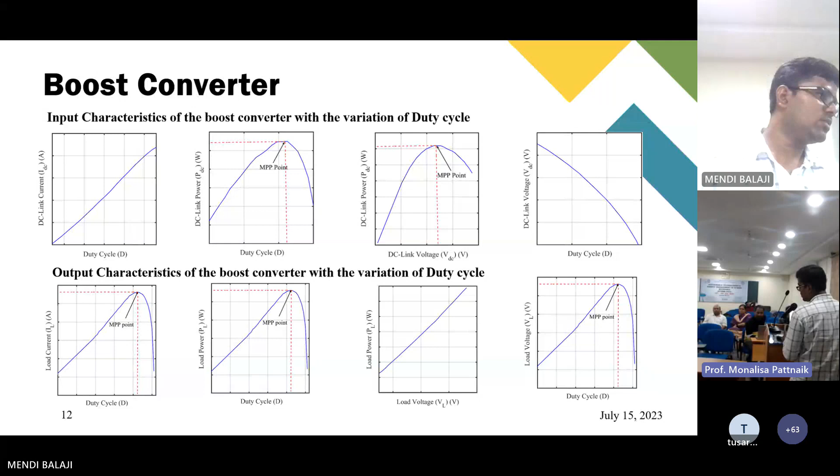Yeah, for a boost converter, the output and input voltage are related by 1/(1-D). Isn't it? I'm not getting it. The output voltage and input voltage, what is the relation? It is 1/(1-D) into input voltage, that's the output voltage in a boost converter. Yes.

Okay, so when the duty ratio is increasing, the output voltage will be increasing, but simultaneously how voltage and current should be, will be increasing or reduced?

Actually, why? This is not the boost converter alone. Here the boost converter is integrated with the PMSG based wind system. There we are getting these characteristics. This is not operated alone, it is integrated with the PMSG system. Then only we can get this kind of characteristics.

This one is okay. Can you tell me, during the same variation, how the output voltage of the converter will be varying with respect to duty ratio? Have you taken that one? Means the output load voltage, right?

The load voltage and load current both are having similar variations, you can say. See, in the third figure, PDC-VDC characteristics, and in the seventh figure, load power versus load voltage, both are not having similar characteristics.

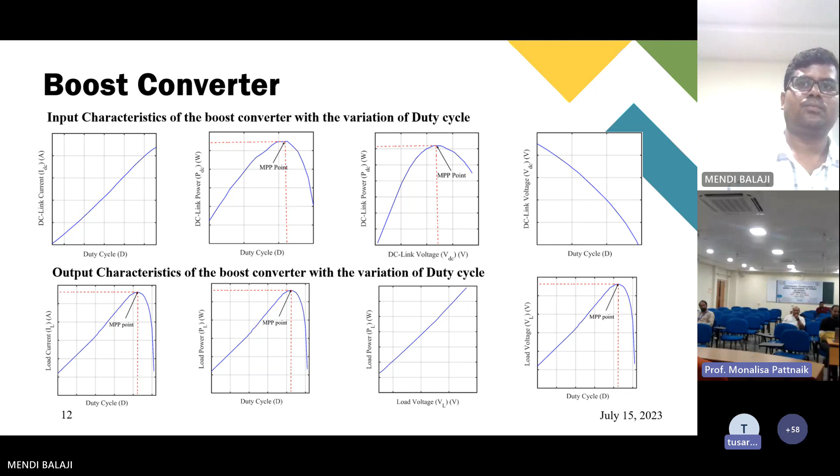Okay, I thought that we might have some other advantage of using a DC motor, that's why we have used particularly that one. In a DC motor, the controller is very simple when compared with the other motors. Okay, thank you.

Okay, any questions from participants? Any more questions?